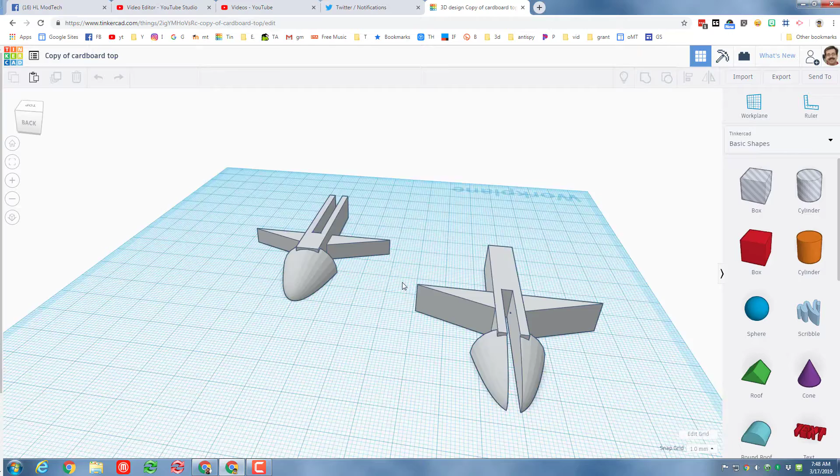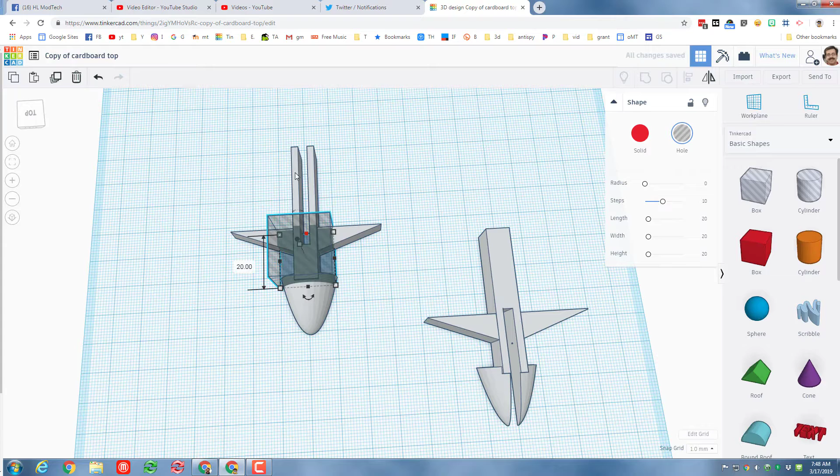If I was being real slick yesterday, we know that with the Glowforge, these cut exactly the way the profile is. So I could have done this way back in the beginning, where I just brought out another box, lifted it up 1 millimeter, stretched it just as large as the whole project. I love using these little black handles because then it only goes in the direction I care about.

I'm going to use that same piece twice, so I'm going to do Control D to duplicate it, and I'm going to move it over to where I will slice this in a moment. I want to make sure they're not in the way, and right now I'm going to grab those two items and group it.

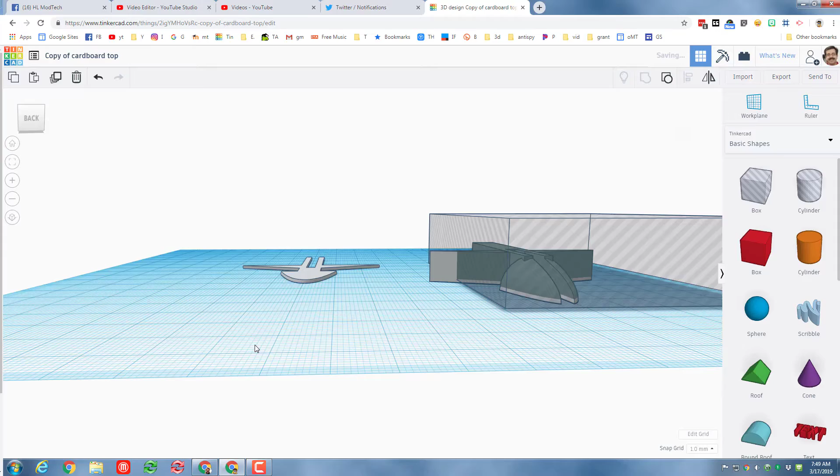So I've got the profile that I'm going to use on the Glowforge really looking just like it does when we slice it as a SVG. Grab these two, make sure I've got all the pieces selected, and boom, I've got the same thing.

Now this is what I should have showed you yesterday, and this is what's going to make today really cool. I know that my cardboard is about 4 millimeters, so I can now take that profile and make it 4 millimeters. I am actually manipulating the size and shape as it will be coming out of the cardboard.

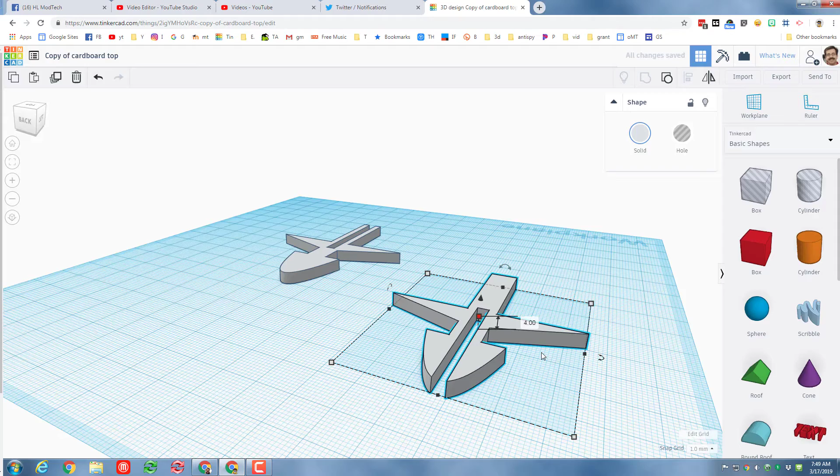How does that help us? Well, let me show you.

If I take these two parts and stand them up, and I'm going to use the cool rotation handle, notice how my mouse is close to the shape and it snaps to those 22.5 degree markings. When I hit the letter D, it drops to the work plane.

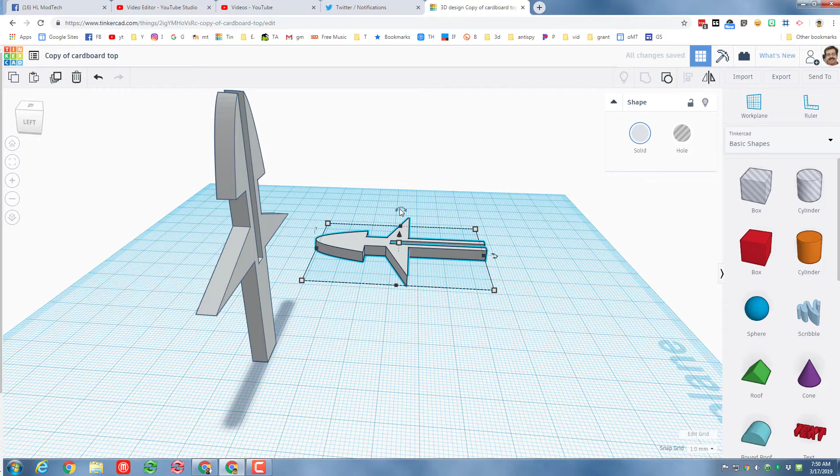I'm going to take the second one, and once again, I'm going to show you how if I move way away, it goes 1 degree at a time, but if I stay close, it snaps to those exact 22.5 degree marks. Once again, I'm going to press D to drop it to the exact height.

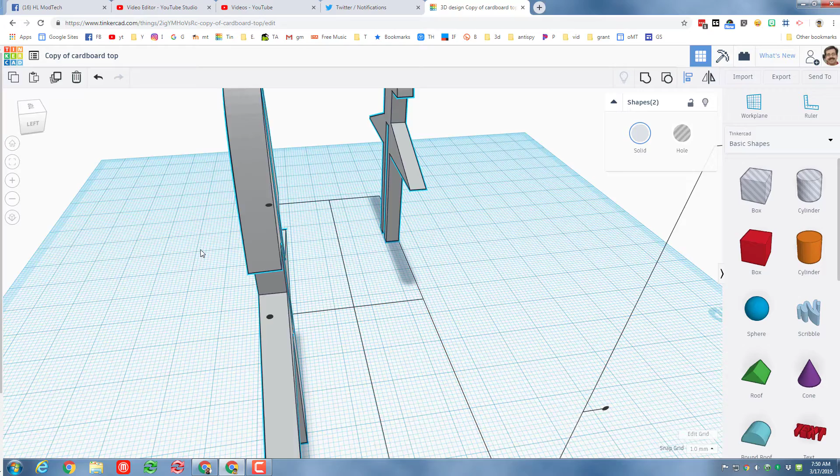I'm going to select both of these, and I'm going to use the Align tool to get them so that they're centered. I'm going to scroll out so we can see the markings a little better, but I want it to be centered this way, and I want it to be centered this way.

I'm going to click on either piece, switch to rotation. I'm going to rotate it 90 degrees, and there, my friends, is the beauty of doing this in Tinkercad.

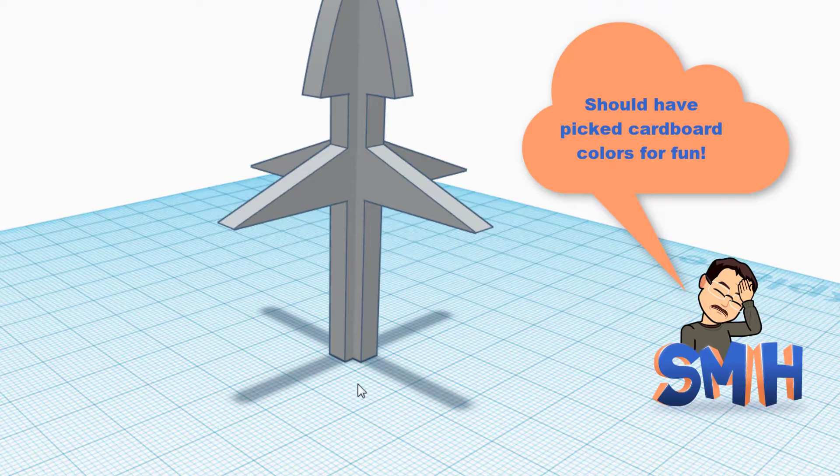I'm still going to cut these out on the Glowforge using the SVG, but now I can see how they interact with each other. To make it even more incredible, I'm going to turn on the transparent option. This would have helped me on the first one to know that I had not moved my cuts far enough. This lets me analyze that much better, and you can see that the second one I lined up pretty well.

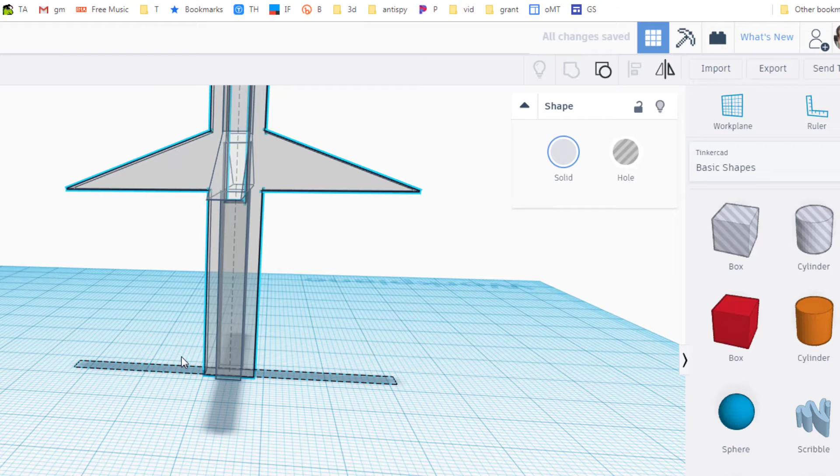With these transparent, I'm going to take one of them and make it a different transparent color. I'm going to make it something bright so I can tell a little bit more which is which.

I like that a lot, but I want to add a disc that slides onto this and then gives it a different center of gravity, so maybe it'll spin better.

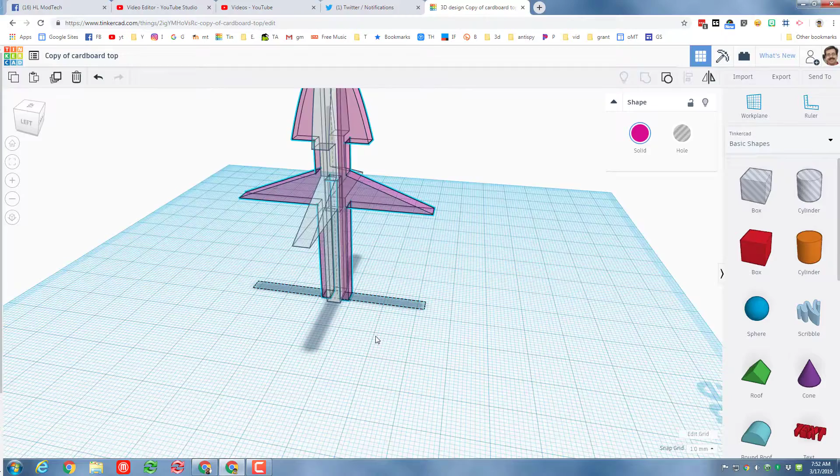So watch this. I'm going to grab both pieces. I'm going to do Control D to take that set of pieces and move them aside, and I'm going to group them.

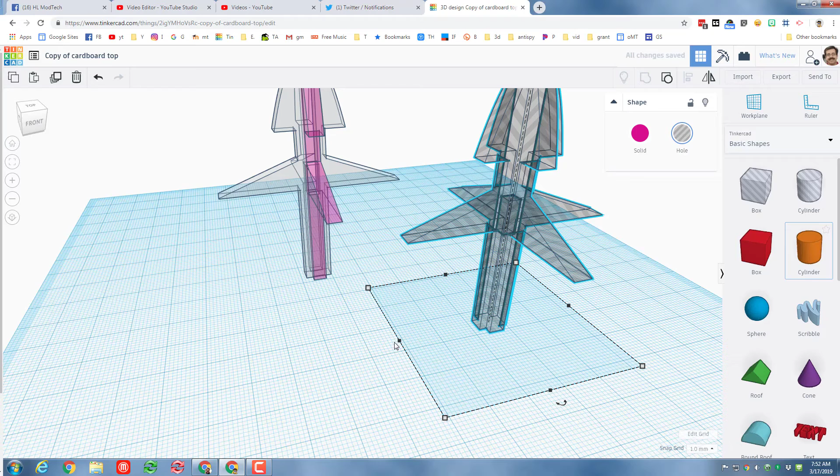What that has done is given me this exact shape here so that I can make it a hole, and then when I bring out my disc, I'm going to hold down Shift and stretch it to the size that I prefer. Switch to the top view and see how it's going to look.

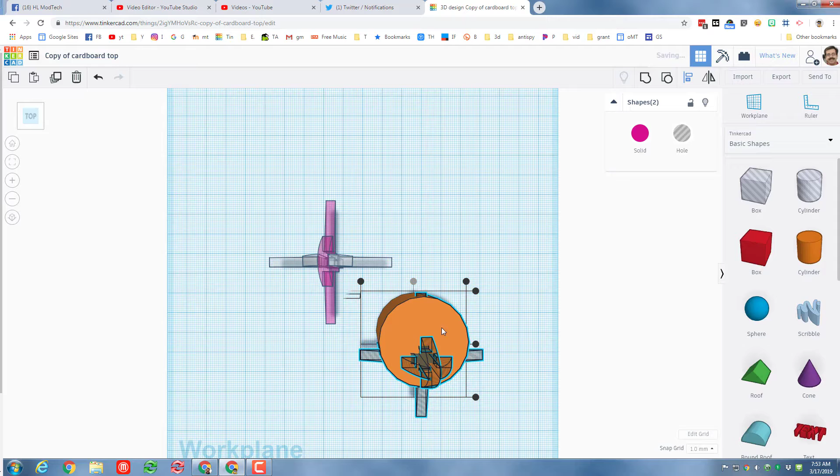If I center it on that shape, I can just grab all of those pieces and do Align, centered in both directions. I can see that that's not large enough, so this time I'm going to hold Alt and Shift, and it stretches in every direction around its center.

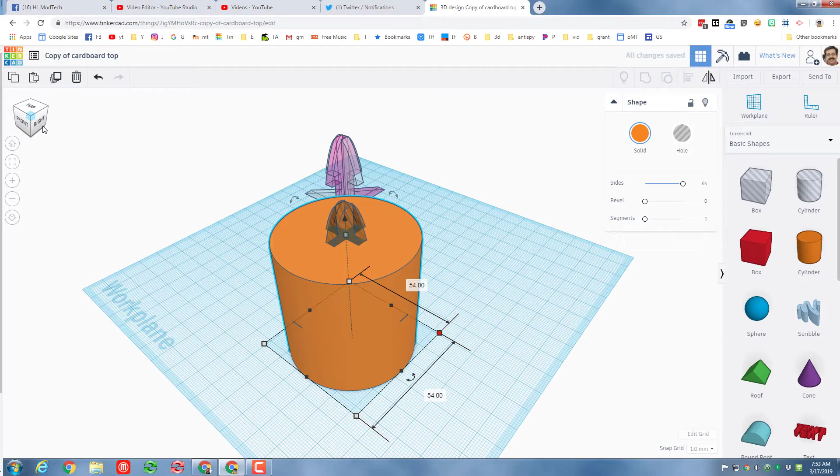I think I like that much right there. I want the sides to be as round as possible. I'm going to look at it from a corner, and it's silly to have it that tall, so I'm going to shrink it down to 5 or 4, just because that's how the cardboard will look.

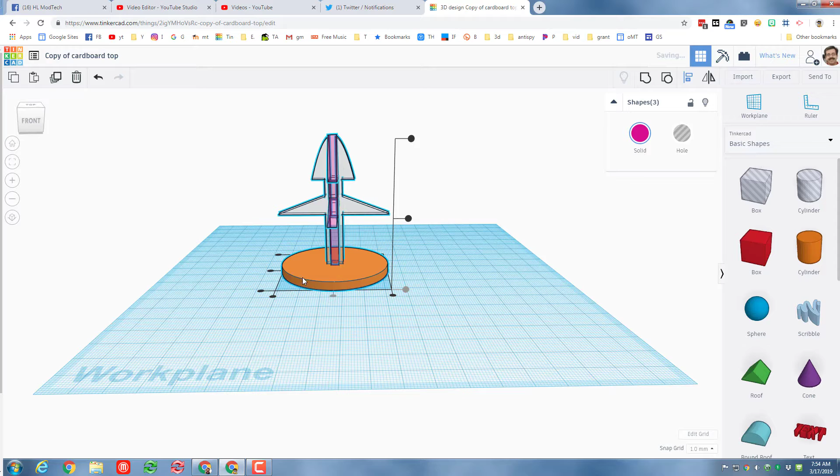And now when I do group, it will cut out that exact hole in the center of my new little disc. To see how it'll look when it's a top, I can go back to the real part, select it, align, align, and then lift this new piece up and set it where it's going to be.

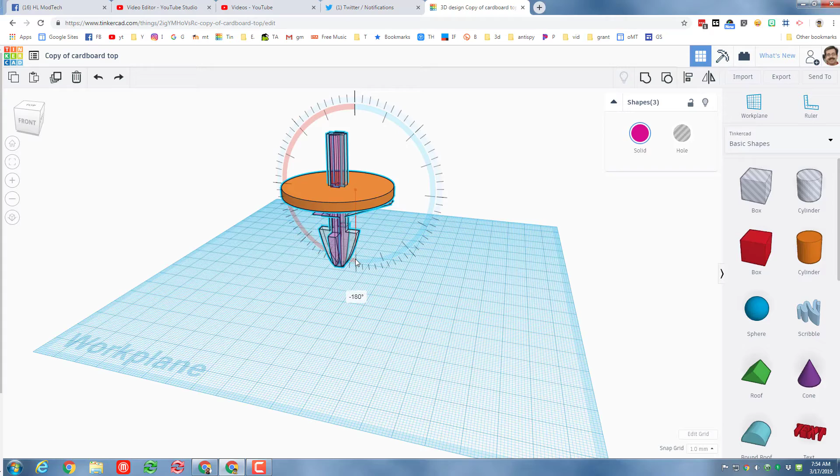That'll be my new top that may spin a little better because it's got a different center of gravity. This is the fun part where you get to cut and test it, but even before I do that, I'm going to just for fun spin it around and take a look at it from all sides, see if I'm going to like this new version. And I think it's got a lot of potential.

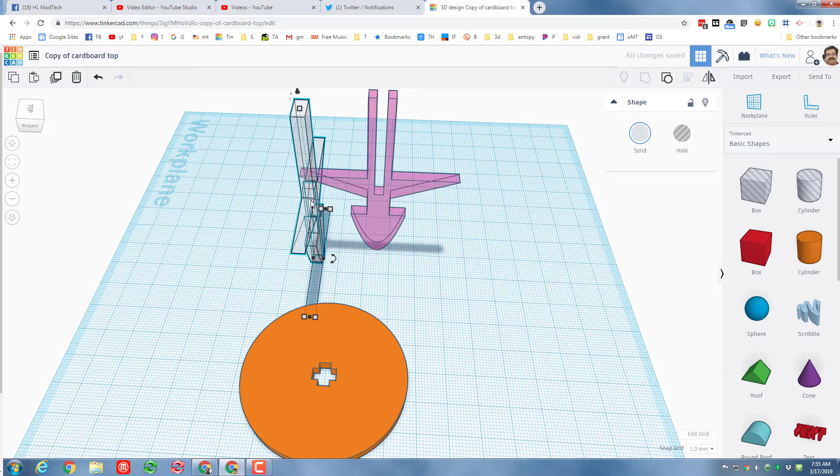So now I'm going to lay down all my parts for printing. Once again, D is drop, and it lays it down on the work plane. I'm going to separate these two parts, do the rotate so it's flat, because if I sent that SVG in that angle, I'd have to change it in the Glowforge.

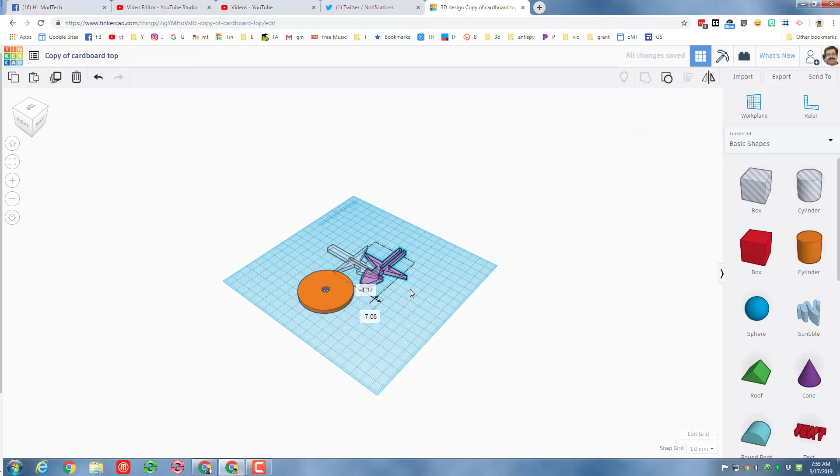Staying close uses those tick marks, which makes it so easy. D for drop. And then last but not least, rotate this one as well. Snap, snap. And D for drop. I'm going to arrange them so they're out of each other's way.

So all I've really changed is this disc right here. These two stayed the same. So I'm going to just choose export. I only want the selected shape, and I'm going to do the SVG option. I'm going to drop it in my Glowforge folder, and this will be disc for the cardboard top.

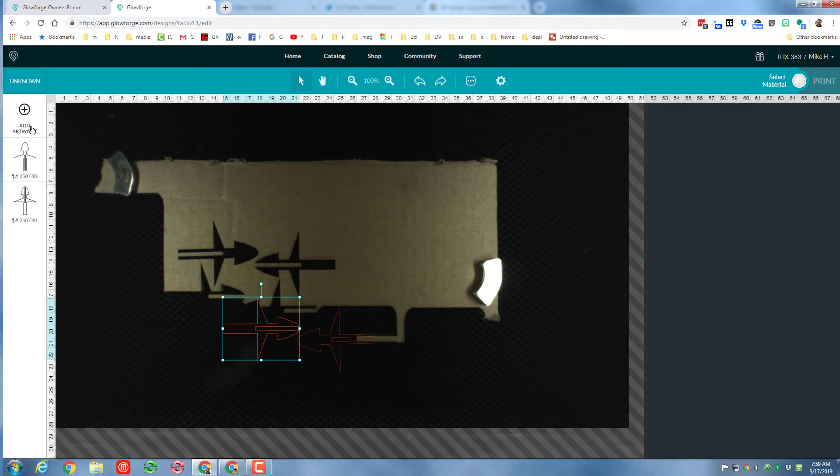And it's time to bring it into the Glowforge app. I'm going to open my old top, simply choose that add new artwork, grab that new disc, and put it somewhere on my little sheet of cardboard.

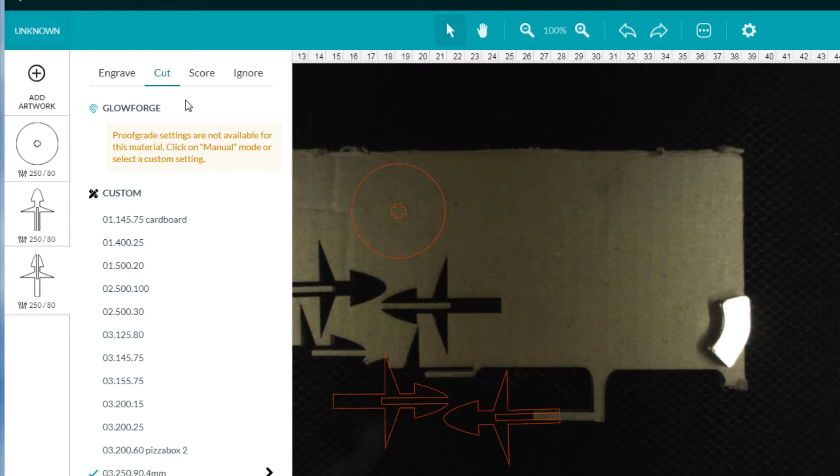I'm going to set its settings to that same 250, 90, 4mm one that I have set up. And I'm going to set the other two to ignore this time, because I don't need to cut them again. And I need to select my material quick. I am using my own uncertified material, so I just enter my 4mm, submit it, and I'm good to go.

Everybody loves the magic button.

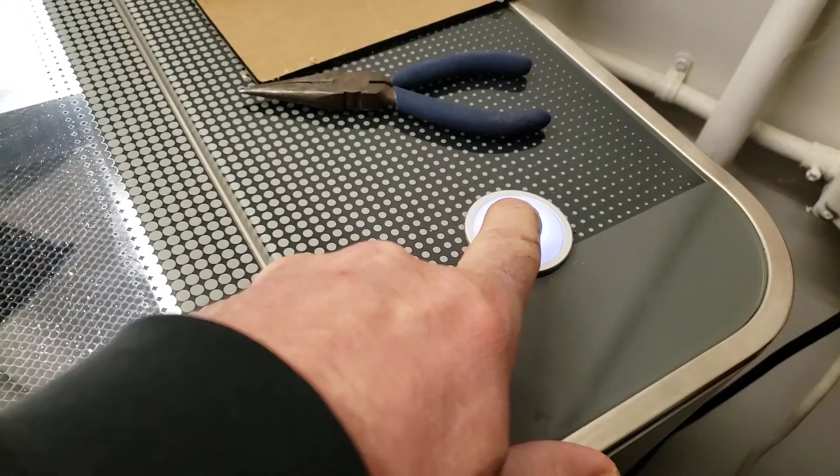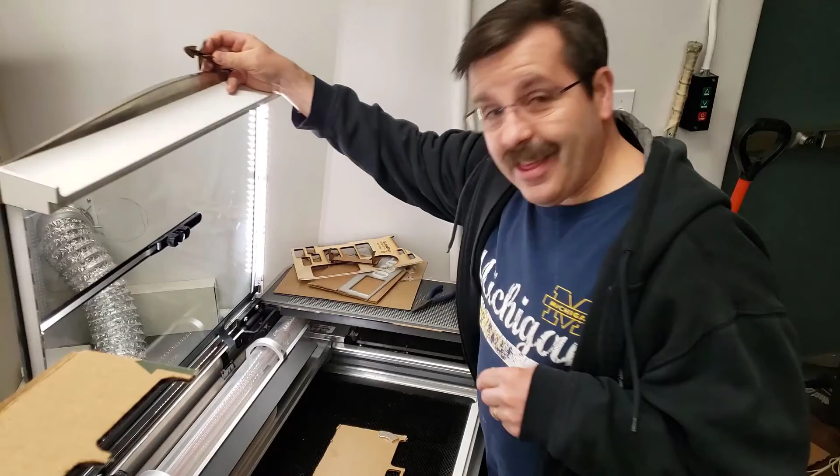Alright, so for once, that was even too fast for time lapse. But let's see what we got.

So here is the new cutout, and here is our previous design. As with any laser cut item, it is so precise it fits on. And let's see if it spins better. Voila! We've got a top.

Oh my goodness. So a little bit of hot glue, and maybe a little hot glue in here too, so that we add a little strength. And we are making cardboard tops.

I did not see that coming. I thought this was just going to be a trial, and then you guys were going to be the ones finding the successful way. But oh my gosh, it works.